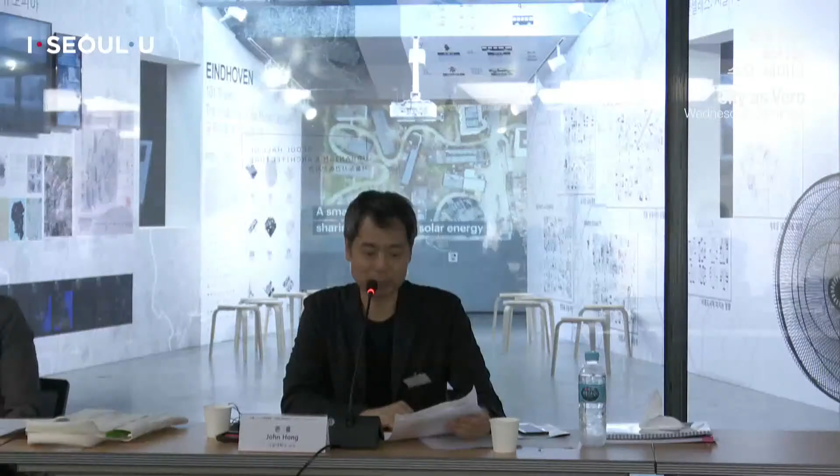Thank you for joining us today. This is the second in a series of Wednesday seminars, and we're very lucky to be partnering with Amsterdam today. Our first speaker is Paco Bunnik. He's the Chief Urban Designer of the Department of Planning and Sustainability. The work of the City of Amsterdam's Department of Planning and Sustainability integrates the higher levels of regional and long-term planning into implementation of urban design and public space design. The department searches for new approaches and stimulates bottom-up, multidisciplinary teamwork that integrates solutions in the fields of urbanization, mobility, and water management. Paco Bunnik is supervisor for the transformation of the Amsterdam Northern IJ waterfront and related projects, and member of the supervisory team of Amsterdam Zuidas Central Business District. Please welcome Paco Bunnik.

Hi. Hi, John. Good morning. Yes, thank you so much for joining. Yeah, great to be here. Although virtual, it's very nice to be back in Seoul. Well, if it's any consolation, it feels like you're in the room right now. You're live. All right. Hey, what's the plan? Shall I start or? Sure, that would be great. Yeah, okay, I'll share my screen. Is this clear? It's perfect, it looks very clear.

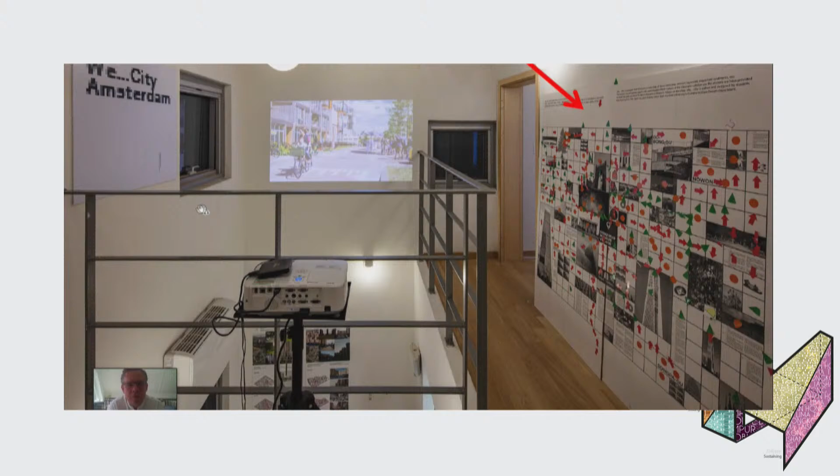So it's very interesting, I think. I would like to come back and talk to the students and maybe make these kinds of itineraries, and by walking, discuss how the city is evolving. So we also gave them a wall in our exhibition, so that they're really incorporated into our exhibition.

I'll tell something about Amsterdam right now—what we're doing, how we're planning, where we come from, where we're going. And also reflecting on the Building the Resilient City theme, which is the 2021 theme for the Seoul Biennale of Architecture and Urbanism.

Amsterdam—this is a nice series of maps which shows the development of the city of Amsterdam, from the 1250s to right now. You see it started as a fisherman's village right on the open waterfront, directly connected to the sea. And later, when the Dutch traveled abroad with the VOC, the East Indian companies, we got richer, and we founded this famous canal district city, which is right here.

What you see happening is that because the city is growing, blue becomes green. So water is—we call it inpolderen—turned into polders, gained from the sea, made for agricultural purposes to feed the citizens of the growing city.

Then in the industrial age, train lines were made, and more blue becomes green, and the city is still growing. Then in the 60s, you could call it the age of the car—new car roads were planned, new land was made. Also the surrounding cities were growing, as you see. But this is really car planning modernism in a way.

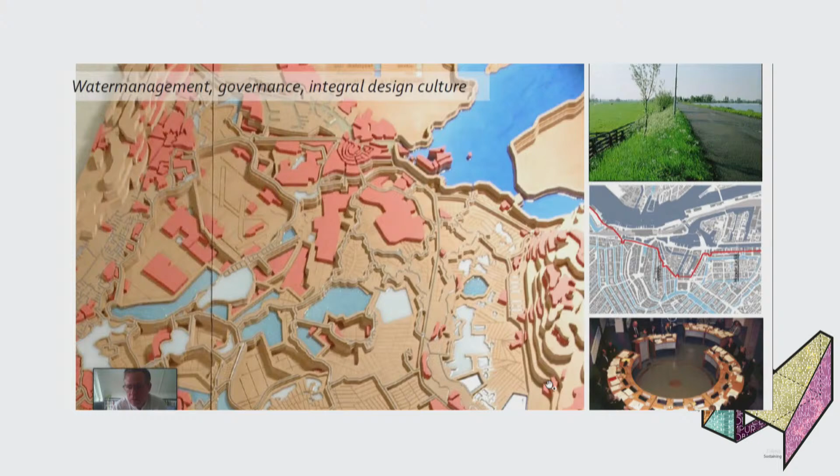That means that's also part of the way we think and design on multiple scale levels—it's in governance, within the city limits, but also in the landscape. So it's all done in one system.

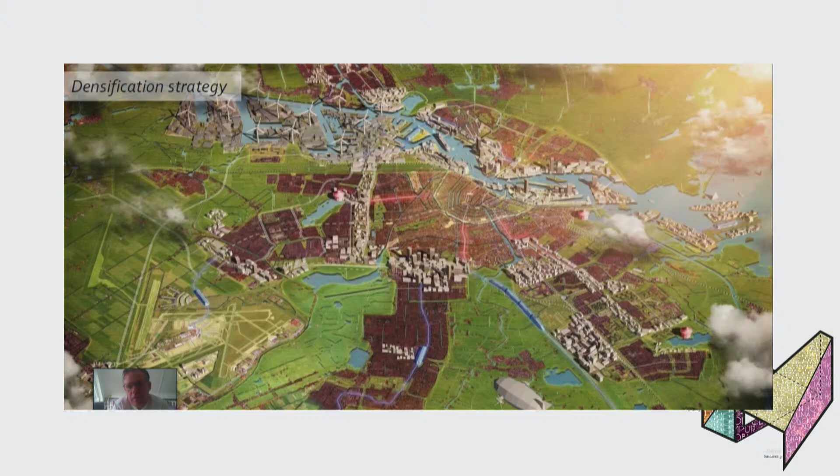When you look at the city itself, this is a map we made in 2011. It's a bit old but still quite active and right. I think the densification strategy—because we're growing, the city itself is about 880,000 people, and the region is about 2.4 million. In the city itself, this is an extension plan made in 1934. There was first this circle, and then these fingers came out in the extension plan of '34.

What we do now is densify within the existing perimeter of the city. The city looks more or less like a hand - these are the fingers, and this is the landscape interweaving with the fingers and penetrating towards the center. We really like this scheme because you're always within a 15-minute bicycle ride of a beautiful landscape, so the relation between city, landscape and water is always eminent in Amsterdam.

But because we're growing, we have to densify within this perimeter of the city. We do it in two ways: on the waterfront, or on pre-industrial zonings or the car road around here. So we try to make smart use of the space.

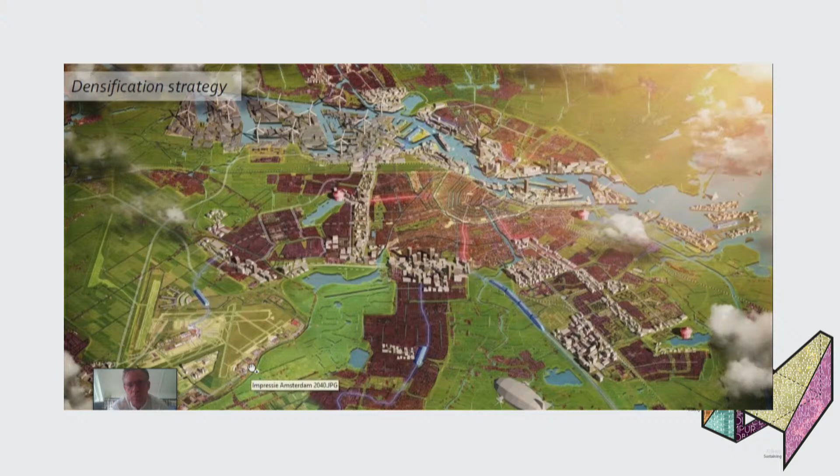Here in the picture, we make new land, new islands on the waterfront where we build new cityscapes. But I think this is only about 10% of the renewal. I think 90%, by far the biggest, are in these transformation sites - old industrial sites, non-used spaces. This is the biggest task we're having right now.

Amsterdam has a DNA, I think, with a local connection - it's founded on the water. It has a relation with water, in engineering, but also in beauty and in culture. It was founded on the river Amstel, where a dam was built - that's why the name Amsterdam comes from. And that's where the old city was built around.

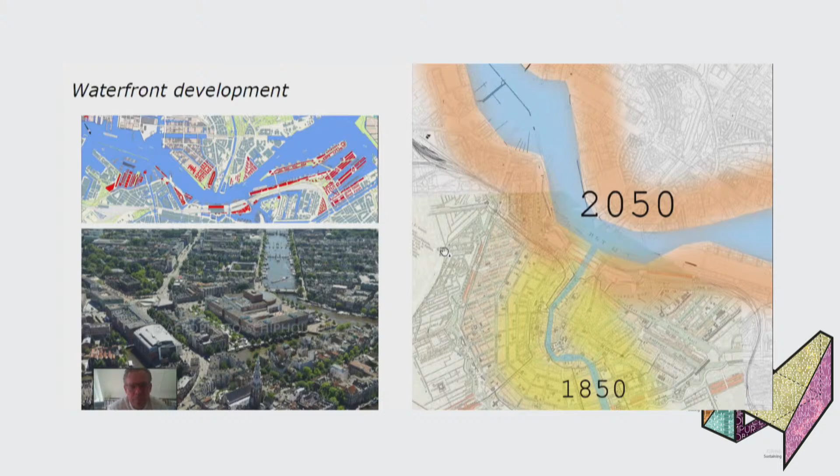But the new city we're building right now is more or less built around these longer waterfront developments. This shifts the center of the city more towards the bigger water, which is really interesting, because in the mental perception of the Amsterdammer, the center is the center of the city. But because we're growing more pluriformly around the center and along this waterfront, the whole mental aspect of what is the center - which maybe for Seoul is already totally clear - is not yet clear for Amsterdam. So we're developing into a more broader system of urbanity, which I think is very interesting and very healthy for a city like Amsterdam.

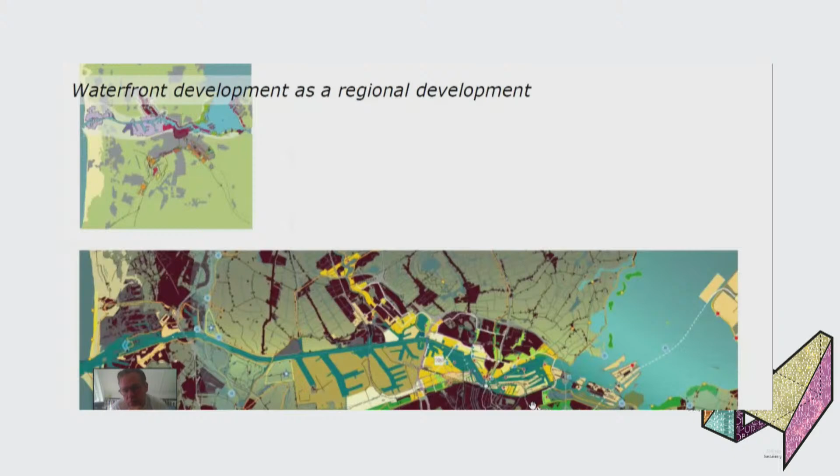It's not only the city, it's also regional. The whole waterfront is about 60 or 70 kilometers of re-engineering, let's say. The harbor is moving towards the sea, westwards, and the city is growing that way, but also eastwards. We have Almere, another city, building new islands like IJburg, and maybe making new infrastructure connections. So in the future you'll be maybe 10 minutes from another city where you now travel for a longer period. Reusing the waterfront and densifying more is a very interesting way of urban design.

Here's a picture of the metropolitan region level of Amsterdam, with bigger numbers, still growing in economy and jobs, also having to deal with climate change, and energy production and consumption changing fast. So how to deal in a bigger scope with these themes.

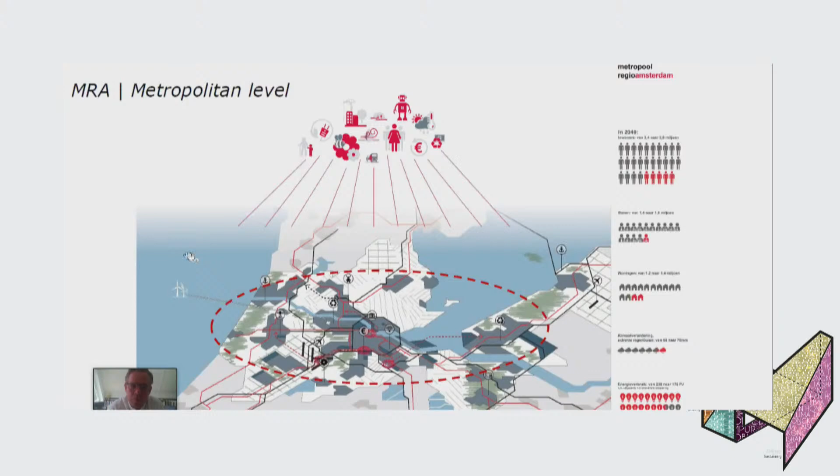When we zoom back into Amsterdam, within the city limits, right now I'm supervising the northern parts of the waterfront, because the southern parts are more or less finished. Here's a project going on, and here's a really big one - Havenstad, which is about 50 to 70,000 new housing units.

On the whole, you see that within a not really big area, we're planning more or less more than 120,000 housing units, which is enormous - you could say it is a city within a city. And it's not only houses, you need public space, hospitals, new schools. So it's all part of what we're planning right now in Amsterdam. Within the existing city limits, we're densifying enormously.

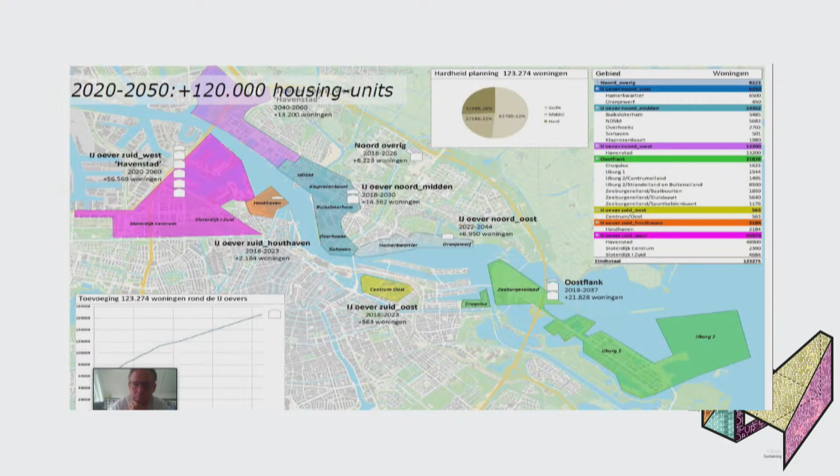Now we're currently designing a new plan on Zeeburg Island, where we also experiment with new typology. Amsterdam is not really known for high-rise, more low-rise, mid-rise, with some high-rise elements. This is the first urban plan where we really experiment with high-rise, also because it has a position in the middle of long views, so it can be interesting to test high-rise here at different scales.

But we also make other, more suburban typologies a bit further out of the center, which have a more natural or beach-like character. So it's a very sort of catalog of urban design on many levels, you could say.

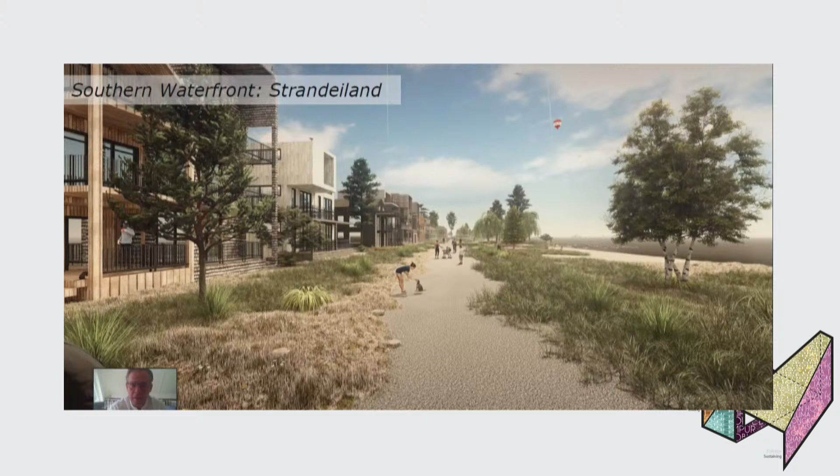Very important in this whole waterfront strategy is investment in public domain, not only in public space, but also in landmarking and programmed landmarking of culture, which is super important. On strategic locations on the waterfront, we planned nice, beautiful, big buildings with, for example, a film museum, theater, courthouse, musea, etc. So they have a fixed place on this waterfront, so you can travel by boat or experience the waterfront from the point of culture. This means an enormous revenue for the city.

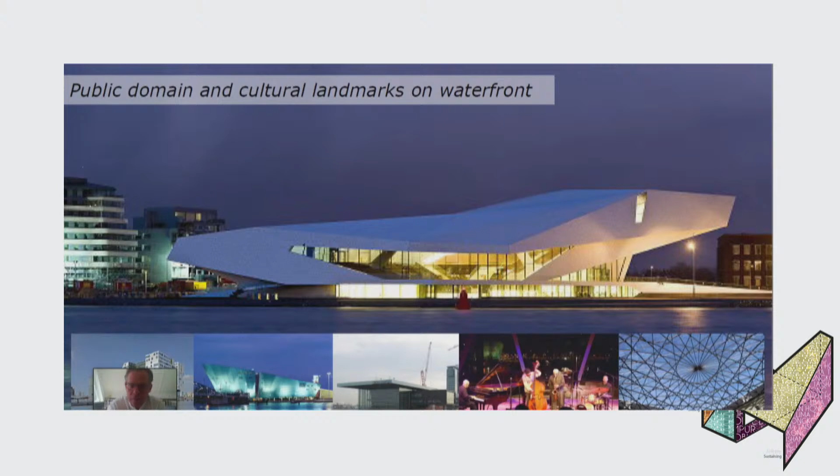It's always multi-dimensional. Originally, the city itself planned to have a sort of urban business district on the waterfront. But then the first bank, the client ABN AMRO, decided to go more near the airport, and out of that plan, the central business district was founded. So the whole waterfront is more or less without big business. It's more culture, housing, and public space, which really defines the character of that waterfront.

I told you also that public space is very important. So how do you invest in it, so that it can be adaptive to climate, but also to different kinds of uses. I think in any waterfront project, the huge investments will be in public space.

When we go to the northern waterfront, this is also the thing we exhibited in Seoul. We look at a totally different kind of character of a cityscape. On the southern part were harbors, so not really polluted, but just all the remnants of harbors, which were empty, redone into new city. But on the northern waterfront, there were really large industrial sites, very polluted areas, very hard to make new city schemes here. But anyway, we're working on it, and we're doing it quite successfully, I think.

Here you see some projects. This is the NDSM, a former shipyard. It used to be a secluded island, with the water going around it. These are remnants of the old shipyard, where really big ships were built. Then when it was empty for a few years, it was squatted, and then the city made new plans to build a sort of new urban area in the whole area.

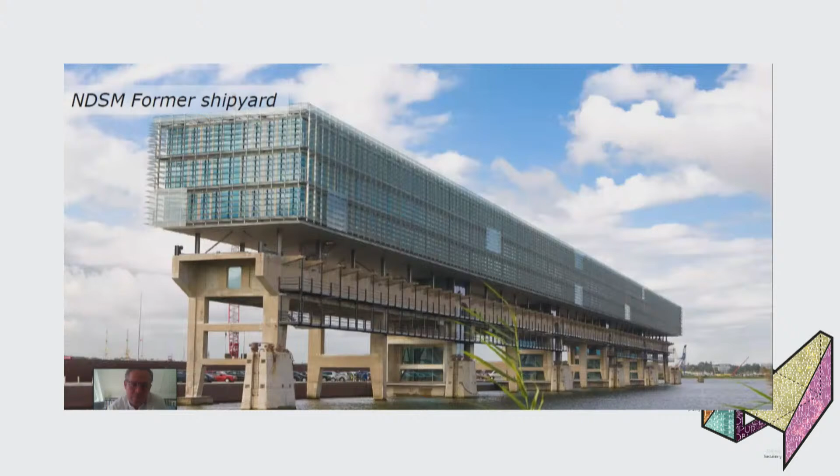You see an example of an old crane dock, where by a local initiative of Trude, an architect in Amsterdam, she said, 'You can't demolish it,' because the city plan was to demolish this whole structure. She made a plan to save it and to build an office building on top of it. Now you see that this kind of initiative is embraced also by the city, and it means that you add value and plan more towards your history, not only the future.

Here you see another example of how to reuse this kind of post-industrial site. These were the slopes where the big ships were built and sent into the water. Now we use it for big festivals, etc. Within these huge cascos of the old industrial buildings, we plan a variety of programs - dance festivals, artists' villages within. So the numerous programming within this whole casco city gives a huge liberty for cultural programming for the city itself.

This year we will open up the biggest street art museum in the world, also here, and it started really local and small, but now more famous artists have come in, already visible in the area. This is going to be professionalized, and it's also becoming a really important museum in Amsterdam, and maybe worldwide, celebrating street art.

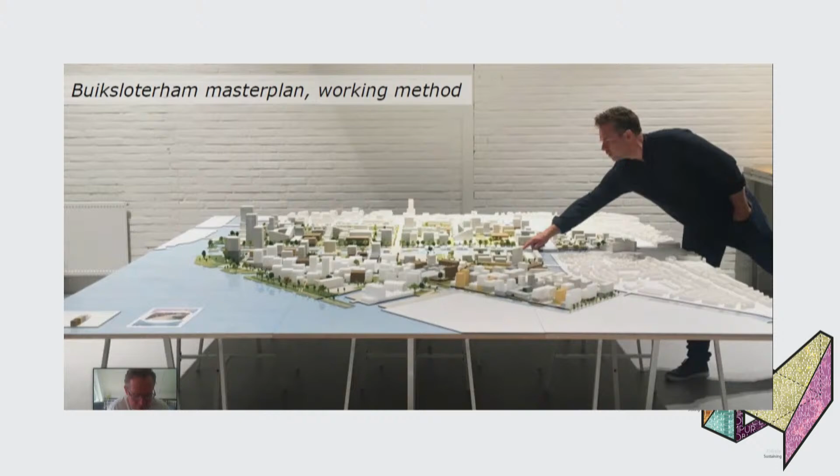I would like to explain the working method, which fits, I think, the Biennale theme and also the way we could work more inclusively in urban planning. The Amsterdam urban planning system was quite top-down for maybe decades, and now we are trying to develop methods where we can include external professionals, young architects, habitants, stakeholders, etc., within the process of planning.

Which is not easy, but you just have to do it and see what comes out. And this project, for me, was the first real test case of how you could do that.

Not only that, we also incorporated participatory input on the green vision, with local residents who were quite sharp, because they knew their surroundings would be intensified. There were about 1,000 houses, and when the plan is finished, there will be 8,000 houses. So their whole surrounding is changing, and they really wanted to be sure we incorporate enough green and quality in the urban plan. So we invited them to show what we're doing.

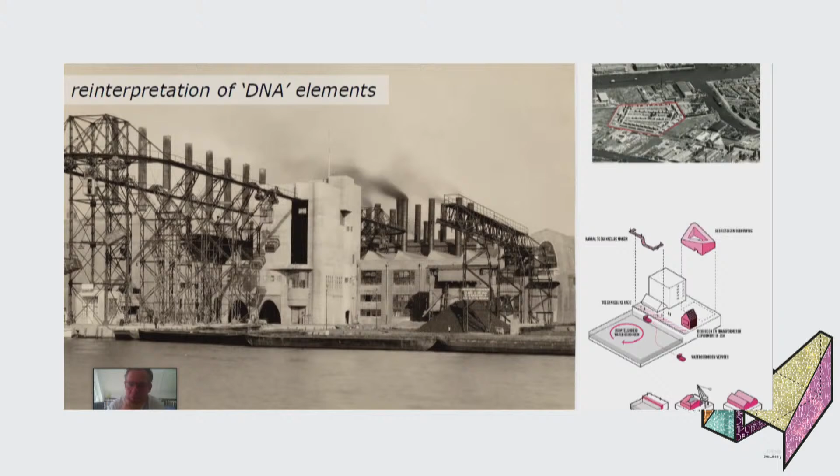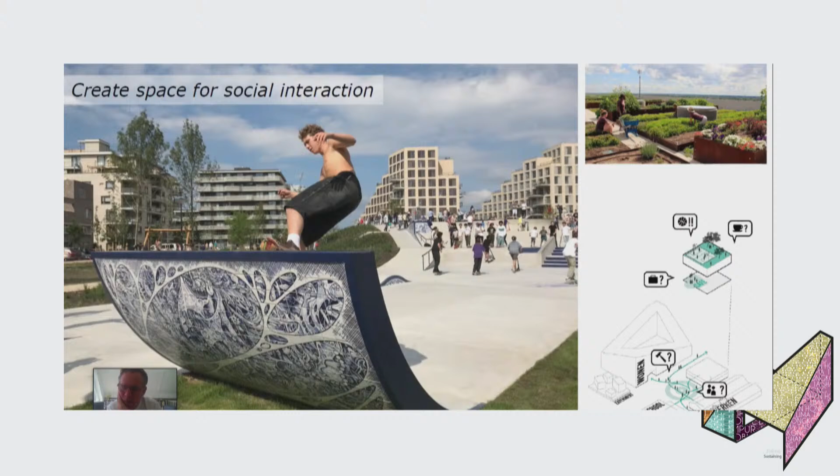We also say that urban planning right now is not only building programming, but maybe the most important program is public space itself—creating places where people can interact, do sports, etc. So thinking about the in-between, what it means and how people can meet, is super important for me.

When we reflect on the theme for the next Biennale, building the resilient city, I was thinking about what we are doing right now in Amsterdam and how we could contribute next year and have a discussion afterwards here. So I'll show you some themes.

Amsterdam has a very strong bike culture, and what's interesting is that it's growing quite fast. In 2014 it was at a modal split of 32%; it's now already at 40%. So the bicycle and the pedestrian are used most.

But what you see in reality is a kind of unfair system of using space. The bike is used mostly by our inhabitants, but the use of space is totally different. Car parking space takes up a lot of room, and 97% of the time those cars don't move at all—yet you use about half the space for the car park. So we can plan much smarter in public space to give more meaning to this interaction and to mobility systems. I think we are in that period of transitioning there.

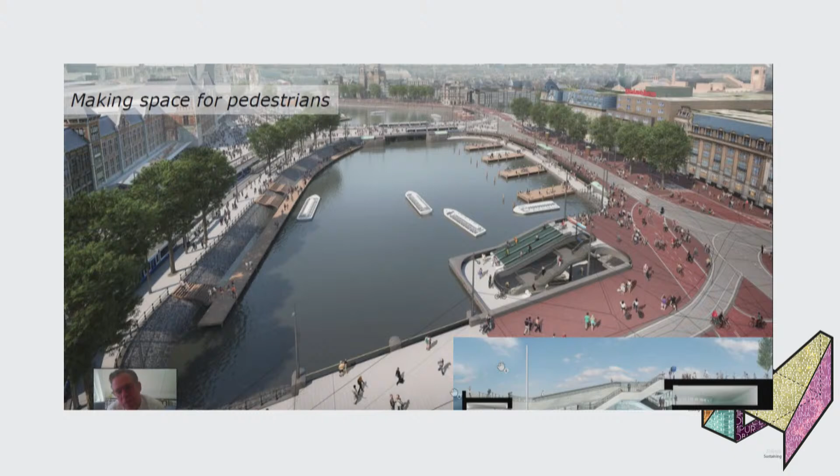So when we redesign this square, we get rid of car infrastructure, open up for water, and underneath the water we build parking spaces for bicycles, keeping the plateau itself free for pedestrians. These are some renderings showing more space for pedestrians and bicycles on top, less for cars.

And underneath this whole water system are 12,000 bicycle parking places. It's a big urban public investment to work for the city of the future, let's say. This is on the front side of the central station and also on the back side on the waterfront, which is a really beautiful area with big views.

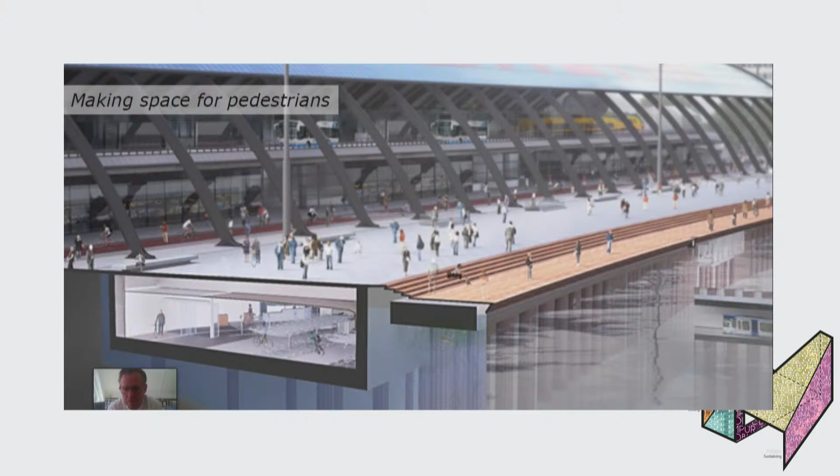We do the same there: we make a new plateau and underneath, bicycle storage. Right now when you go to Amsterdam you see this big bicycle storage on top, blocking the view, but this is under construction right now. In two years' time you'll have an open view on the water.

So the whole quality of public space and spatial quality is, I think, number one for pedestrians. Not only here, we do it in many places, many big squares.

This is Zuidas, a central business district. It was a totally stone square with no trees, nothing. We redesigned it into a more green area with many seating places. It's very important that you give people the opportunity to sit.

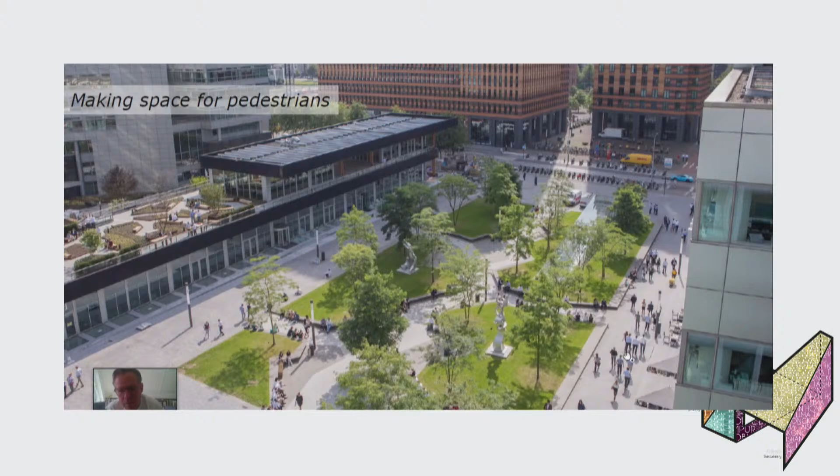But not only that—underneath, also here, underneath the whole square is a bicycle parking, and underneath the bicycle parking is a 1 meter storage tank for water. So in cases of heavy rainfall, this whole system contains the water.

So it's integrated thinking, design thinking, which is social, cultural, biodiverse, but also water management, in one element. That's the way we try to plan our cities.

Colleagues of mine are now working on a quite successful program—a new Amsterdam integral design method. I think it could be interesting to show next year in the Biennale. It's a really refined method of how to deal with public space in this way, doing research on multiple themes: water management, materials, mobility, soil, underground energy, flora, fauna, so nature-inclusive. We find all kinds of ways of possible combinations and measurements in design to incorporate all these elements.

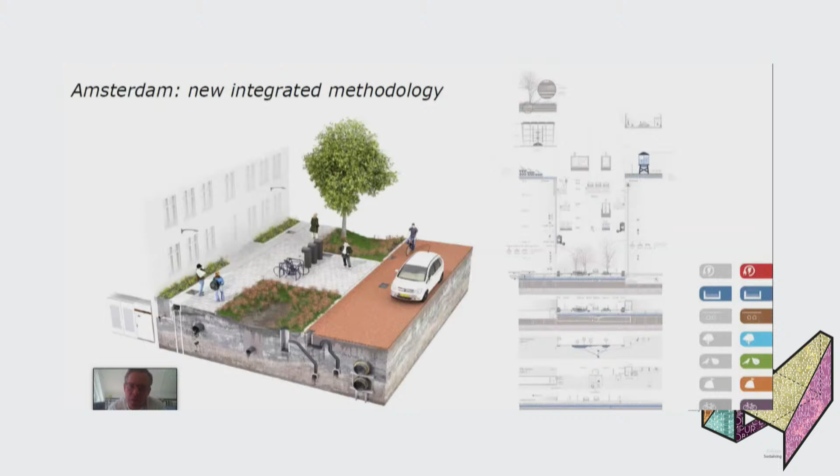I'll just show shortly one of these parts, which is water management. We really study the public space and the buildings together, how they work, how they're measured, how the water is working, and how we integrate them into the new standard way of designing a street network.

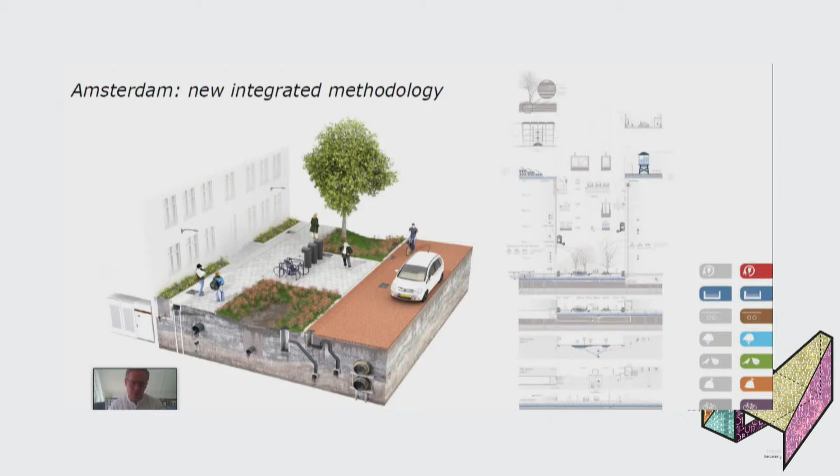So this is just one picture of hundreds, but we're really working on this integrated way of public space design. I think this is my last slide before Tjeerd starts.

When I think of an inclusive city, I think it could be really biodiverse, productive, very important, inviting—which Seoul is, I think, by heart—and adaptive. You should plan in a more adaptive way, and I think not focus on fear and control, but focus on well-being of nature and of people.

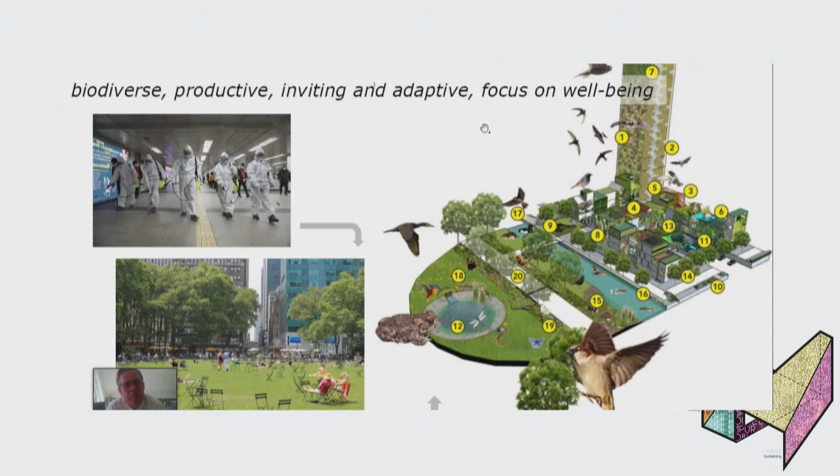I think this is my last slide. This is a picture I found on the internet: the people of Seoul thanked the workers who fight COVID with new technology. I think this is a great picture to end my story. Thank you.

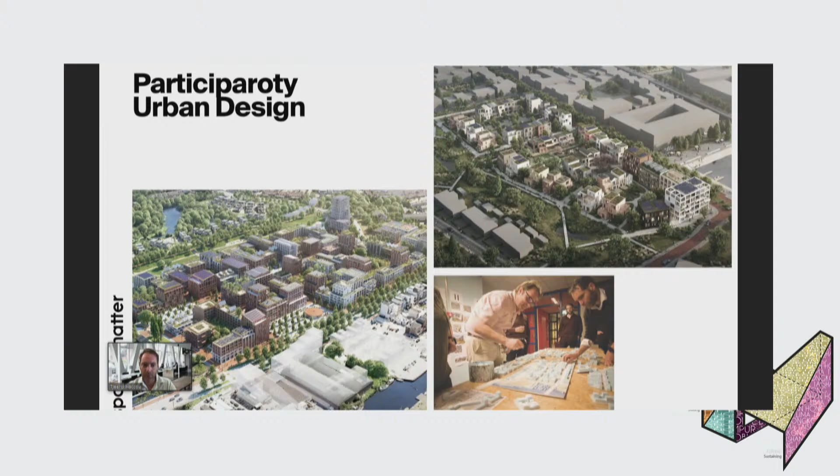We do that on multiple levels. This is the larger level, participatory urban designs, mainly in the Netherlands. We make plans preferably together with residents or people who already live around the areas. In Amsterdam we are working now on three different urban plans, and some others in the south of the Netherlands. But what also characterizes our office is our bottom-up ways of working.

When we started in 2010, there were no commissions because there was a financial crisis going on, and we had to come up with our own ideas and concepts and start building projects out of those. Nobody called us for a commission, and that led to particular projects like the SWEETS hotel that John already introduced, a hotel we made out of 28 bridge houses in Amsterdam that were becoming redundant.

We also initiated a large rooftop urban farm in The Hague—another city—where there's 1,200 square meters of grow beds for crops and 500 square meters of fish beds below them. The dirty water of the fish is pumped towards the green beds to feed the plants, so it's kind of a circular loop there.

Another thing we do frequently is help bottom-up building groups realize collective residential buildings. We've done around six of those. We really promote this way where people themselves come up with ideas and create their dreams, instead of having a commercial developer just build something that fits everyone, which results in boring buildings.

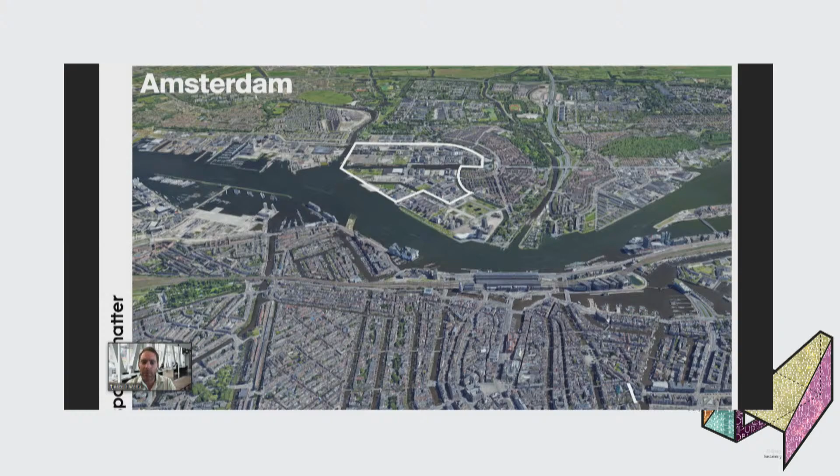Today I will talk a little bit about the Buiksloterham area that Paco already introduced quite a bit. It's in the north of Amsterdam, and our office is actually right in the middle. This is also the place where our first projects really started, and two of those I'd like to tell a bit about: the Ceuvel, and Schoonschip.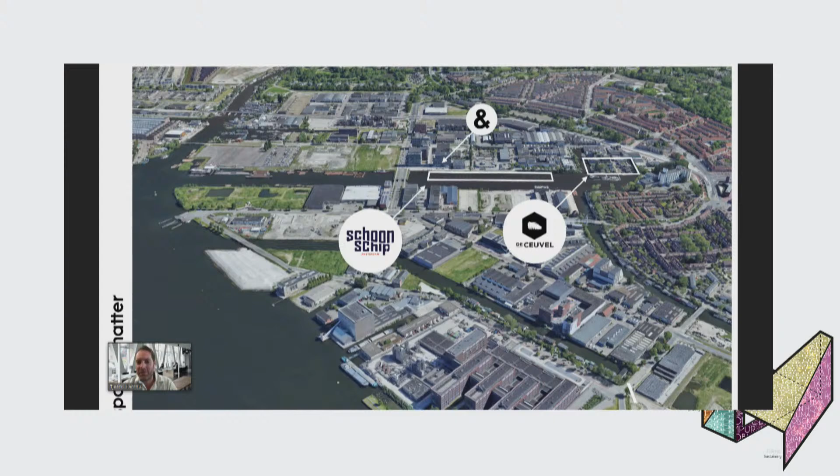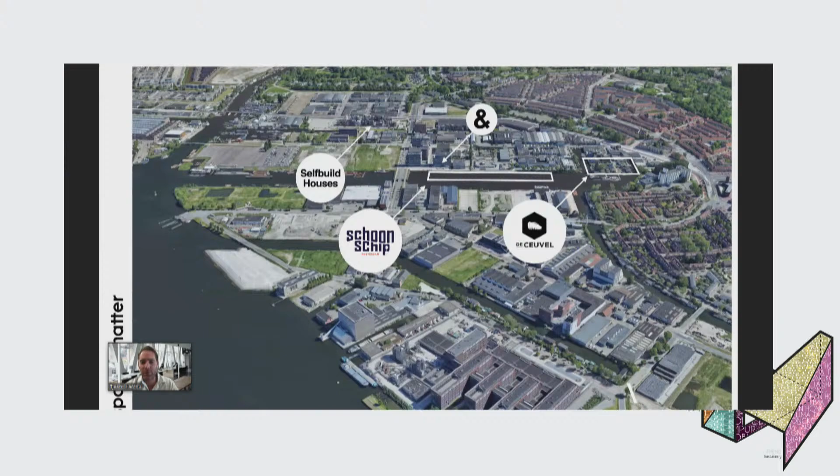It's real Dutch, but Schoonschip means 'clean ship.' Another thing relevant for this presentation is the self-built houses—the arrow shows where my own house is. So I both live and work in the area where I also have the most relevant projects that we do. I made a 5-minute city for myself.

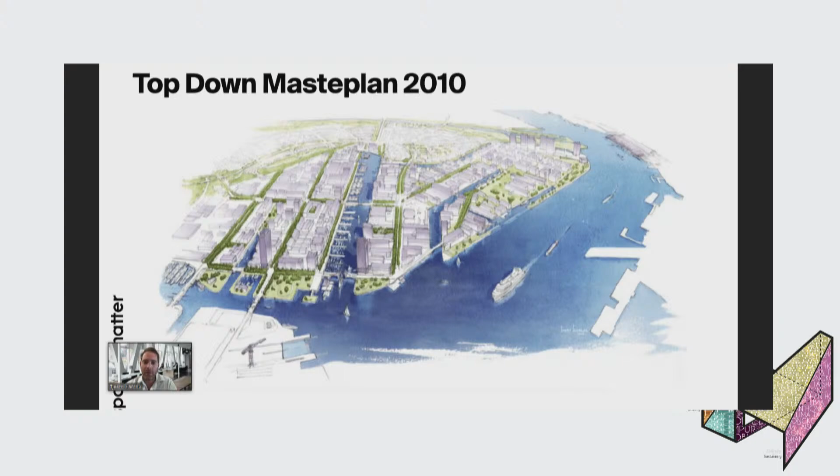The municipality had big plans for this zone, already before the financial crisis. They made a huge master plan for about 8,000 houses, and were speeding up leading into 2010 to implement this master plan. But then the financial crisis hit, and all developments in Amsterdam came to a stop because commercial parties did not want to invest anymore. Plus the municipality also had to pay a lot of money to get things going, which was not possible at the time. So Amsterdam came up with the idea: what if we let our citizens come up with plans?

Then Buiksloterham became a test area for self-built housing, both on a very small scale—individual housing—and as collective buildings.

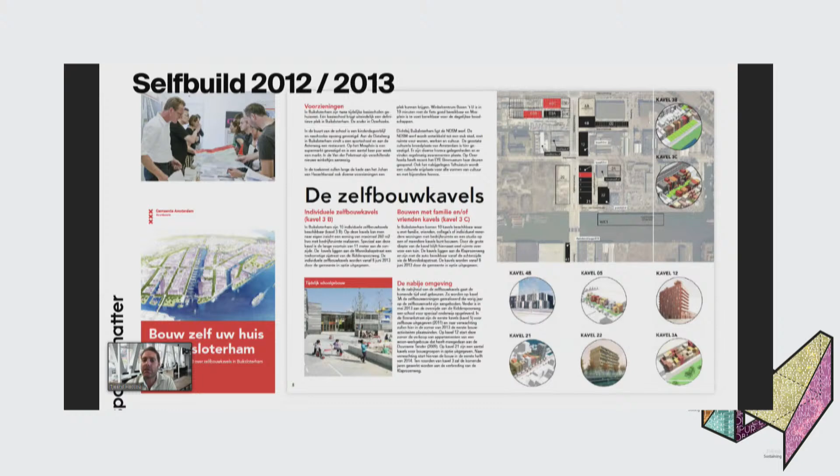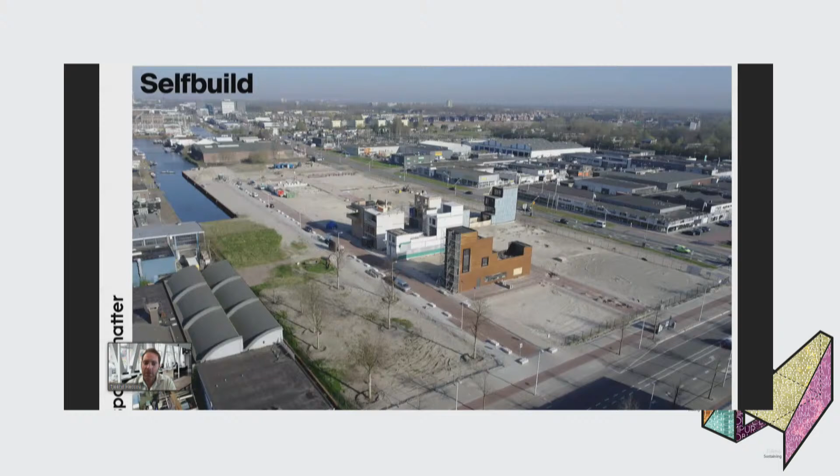The start of this was very slow. Personally, I also managed to buy one of those plots, but no one else wanted it. This was, I think, 2013, when it was kind of an unpopular way of building your house and of living. But then when it started and people saw the potential, it became quite a popular thing in the years after that.

Until it climaxed in, I think, 2015, when people were camping out to wait in line for six weeks. This self-built camping site became news in itself, because it's a kind of micro society that invents its own rules of how people should behave in standing in line for their plot. It was an interesting process.

We had these self-built, small-scale initiatives, but also more collective buildings. This is, I think, seven different buildings, also shown in the movie playing behind you, that were initiated by building collectives. This is actually how large parts of the Buiksloterham are now developed. It's bottom up: people form a community, have their own idea about housing, and build with an architect the house that they want, without a commercial developer guiding them.

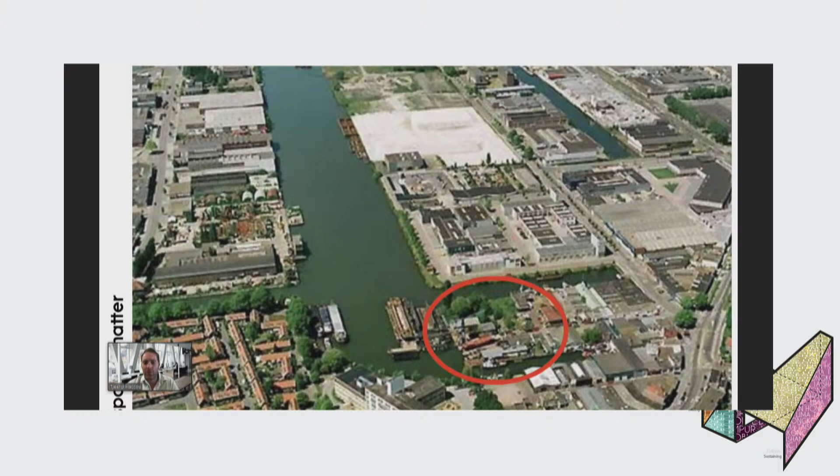Sorry for the bad quality of this image. This is a picture of the Ceuvel in its state before 2000. This is the project I would like to share with you. This is an old shipyard. Here you still see it in practice as a shipyard. But when we found this area in 2012, it was not a shipyard anymore.

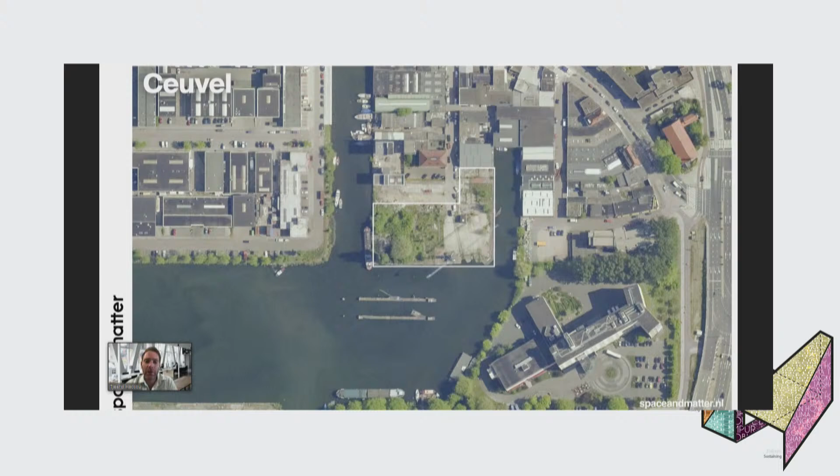It was actually the municipality that had this land, and they thought, well, we need to do something with this. This whole Buiksloterham area back then was a very kind of no-go area. It had all kinds of small industrial companies working there, and as a citizen of Amsterdam, you wouldn't want to go to the Buiksloterham. Then the municipality said, let's launch a tender for this empty vacant space, and ask commercial or market parties if they would like to build a creative incubator on top of this land.

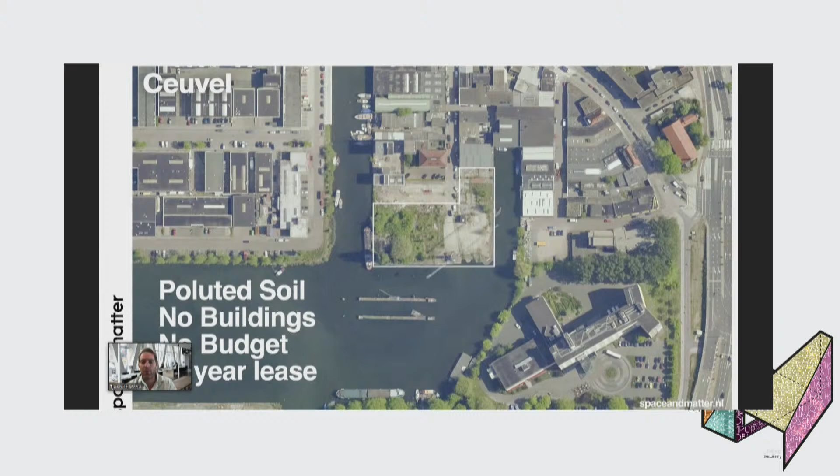But there were a couple of issues. As in the whole Buiksloterham, the land here on the Ceuvel side was very polluted, with a lot of contaminated soil. Another issue was there were no buildings, so making an incubator space for people to work - where are you going to position them? An incubator space is meant for people in the creative industry to find very affordable office space, so there is very little budget. But if you came up with a realistic and manageable plan, you would earn a 10-year lease from the municipality of Amsterdam. So: no money, but soil.

Then we started to think, how can we deal with these issues? We formed a group of, I think, a couple of architecture offices and a landscaper. The landscape architect came up with the idea to use phytoremediation to clean the soil. That means you plant plants, and the plants suck up the contaminants and use them to grow. If we make the whole area a kind of green garden that cleans the ground, we could leave it in a better state when we leave after 10 years.

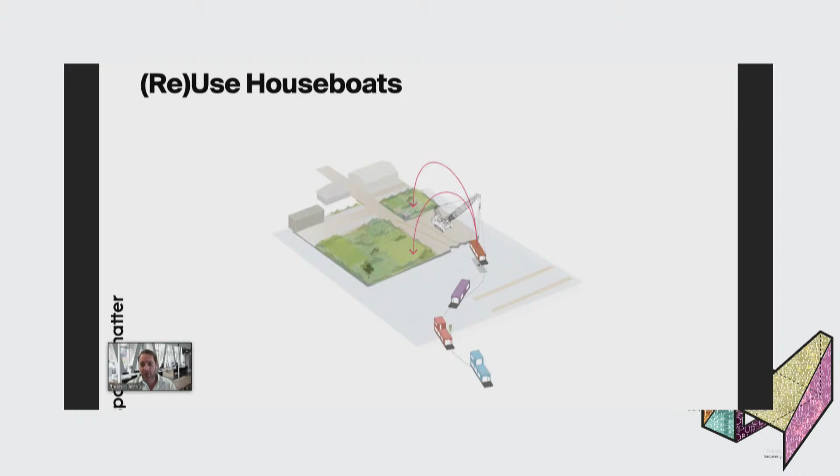So then another idea we had is, why not put old houseboats from Amsterdam on this found garden? Because houseboats in Amsterdam have a negative value when people want to renew them. People in Amsterdam have a position for their boat, and when they want a new one, they have to get rid of the old one and have it demolished. We thought, well, if they don't want to demolish it because they'd have to pay like 10,000 euros, then we take the boat for free maybe, and put them on land. So then we have free space.

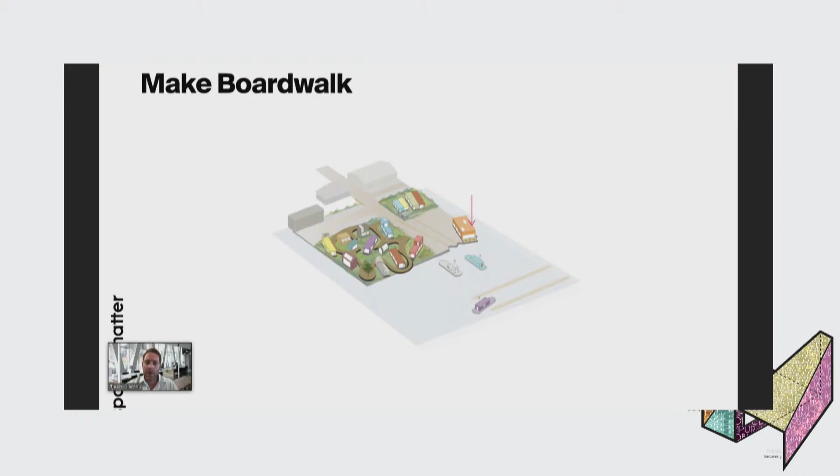Then when we position all the houseboats on the land, we make a boardwalk to connect them and to keep people off the contaminated soil, and we just use the land as a creative incubator. After 10 years, when we need to leave - which will be in about 5 years from now - we just put the boats back in the water and sail to another location, leaving the Ceuvel as a greener and cleaner place than we found it.

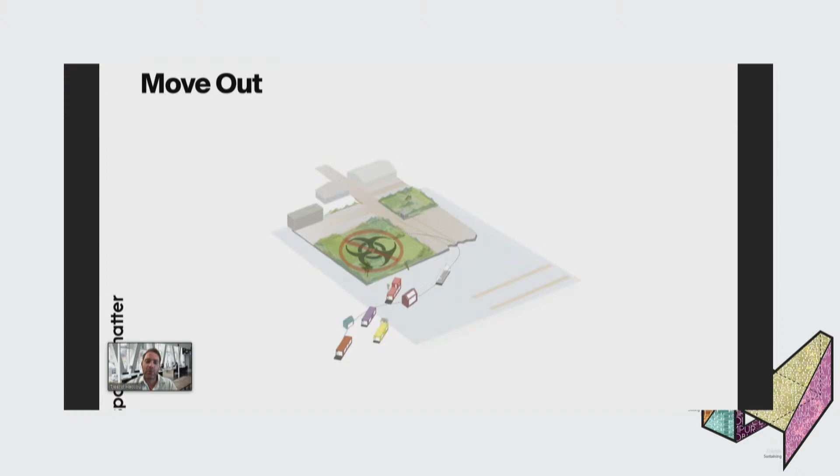So that was our plan, and we made a visualization with that. Then in 2012, we heard that we actually won the competition. We were very happy, and we did not do it alone with designers, but also with a lot of entrepreneurs who already came up with an idea how they would like to work on this land and what they wanted to do with their houseboat.

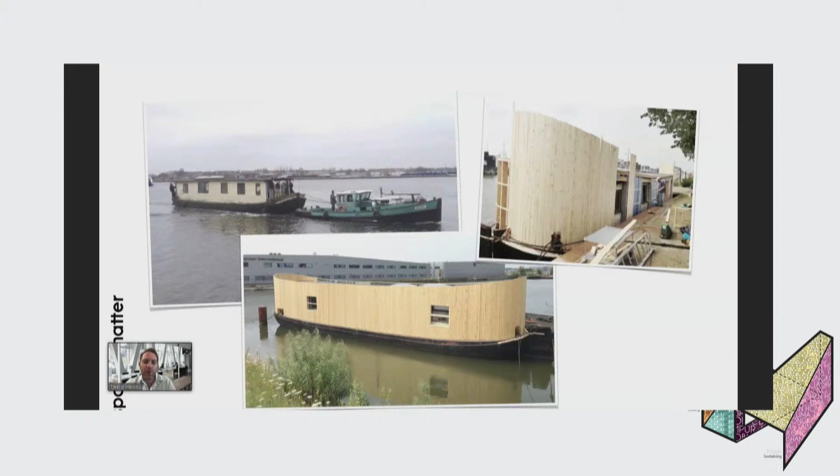So this was the first boat that we got. We paid €1 for it. It was in terrible state, but with a lot of help from the people who eventually rented this boat, we could manage to revamp it, make a new facade around it, also make it way more sustainable and insulate it in a proper way.

And then in November 2013, we collected all the 16 boats that we managed to buy, and we put them on the land with a huge crane. We got a lot of kind of weird objects, well, I think the average price here was really €1 per boat.

The ambitions of the Ceuvel, especially the sustainability ambitions, were really, really high, but there was very little money. So our partner office, Metabolic, who is a kind of sustainability advisory office, they organized workshops for all the future tenants to make, in a very low-tech way, sustainability systems.

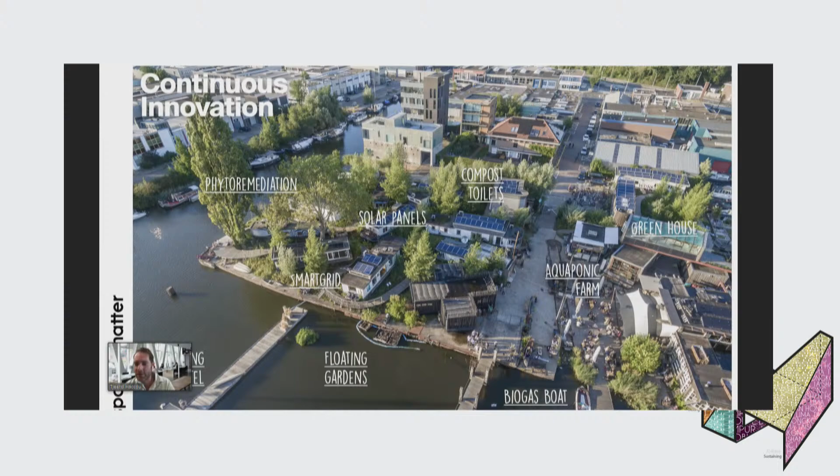So there's solar panels on all the roofs of the boats. There is an aquaponic farm with fish and a greenhouse on top, and it has the same circular system as the greenhouse that we made. There's floating gardens, and there is a boat that produces biogas from the waste of the houseboats, on which you can then eventually cook pizzas in the restaurant.

But one of the main innovations is the smart grid. So all the boats are connected together with a blockchain-based smart grid. The restaurant that you see on the left top, it needs a lot of power, and all the houseboats on the right side have the solar panels.

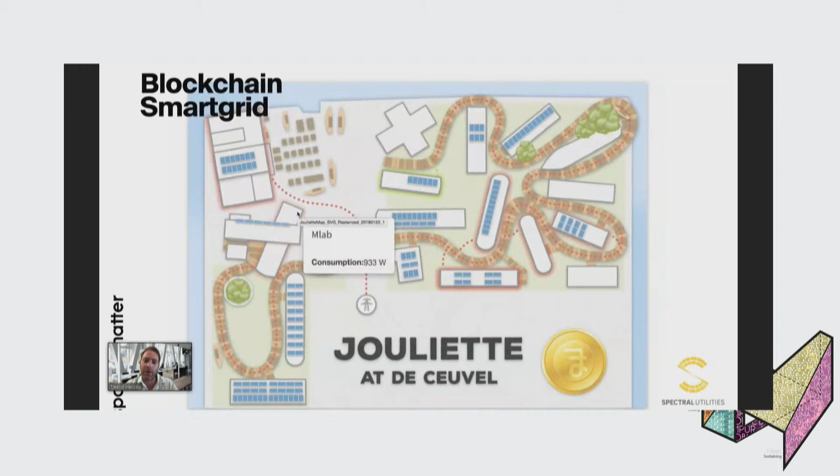So the houseboats can sell their photovoltaic power to the restaurant, and in exchange they get Jouliettes, which is a kind of cryptocurrency. And with that cryptocurrency, they then can go to the restaurant and just buy food or beer. So it is a very concrete way of how a system like this could work.

Because of all these clean tech innovations, there was a real community around these ideas that came to the Ceuvel, both to work but also to enjoy themselves. So it is a very strong creative clean tech community that was built by building the Ceuvel.

So also the routing on the boardwalk, there's all these signs on how we treat the different topics. So it is really a kind of educational routing through this site.

Well, the Ceuvel got a lot of attention in the media globally. We were published, also in Korea, in Japan, in China, in the US, all over the world, which was really nice, because then also stories land at other sides of the world.

But also for the local context, it did a lot, because Amsterdam then saw this happening, and we call it the circular economy that we try to push at the Ceuvel. Then all the developing parties, the builders, and all the groups and the municipality that were developing in the Buiksloterham area signed a manifesto that all the developments in this area would have this circular ambition, so that we would take care about reusing waste, being very smart with energy.

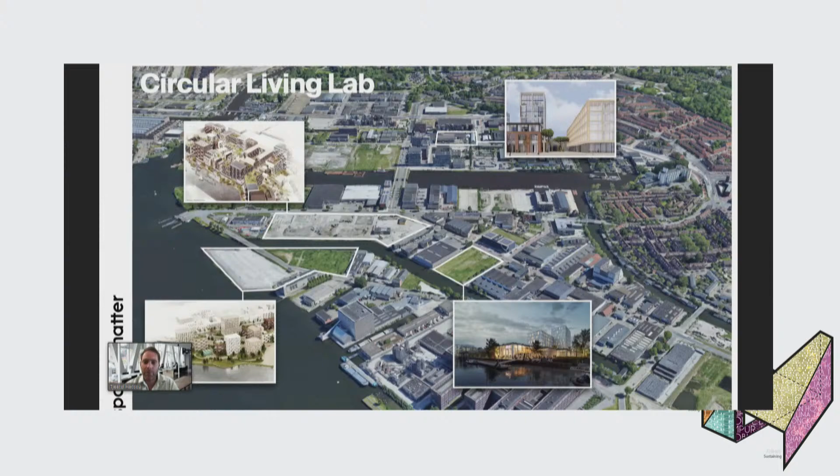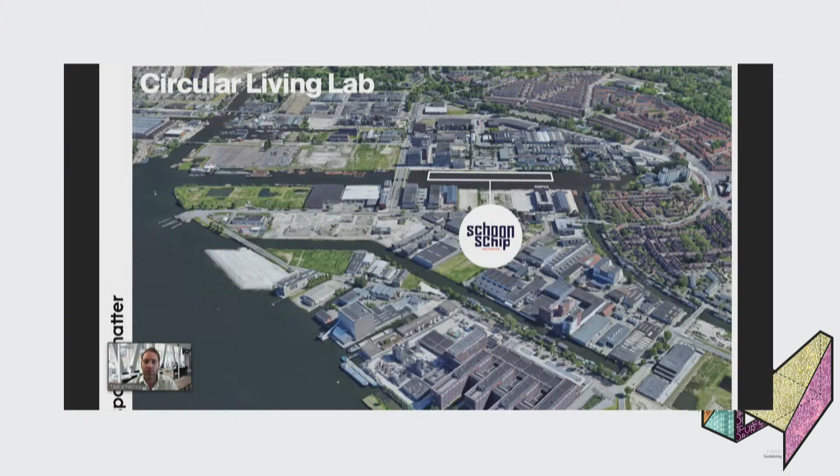This whole Buiksloterham will then become a kind of ecosystem network. One of the most advanced projects in this area is Schoonschip, Cleanship, in which we already made a lot of the ideas developed at the Ceuvel, scaled them up, and put them into practice for a residential project. Schoonschip was also a real bottom-up development.

It started with the lady on the left, Marjan, who we met around 10 years ago. She had this dream that she wanted to live with her friends in a very sustainable and floating way. When we met, we said we would love to help you with realizing your dream. We had some workshops with the group, translating their idea into a plan.

So we made a booklet, nice visualizations, and a nice model, and then we went to the municipality of Amsterdam and asked, can we have a place for this? We just need a plot of water. And we managed to get one in the Buiksloterham area, as you can understand now.

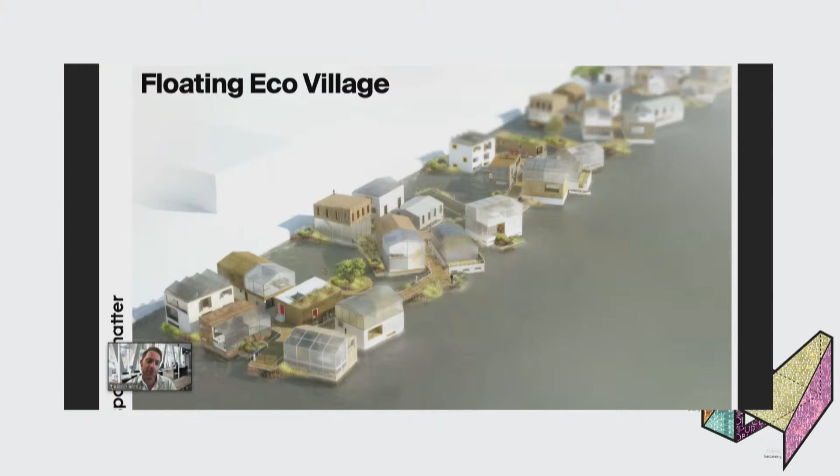We had this idea to make it a very floating eco village. There are currently 46 households living here on 30 floating villas almost. So we helped the group create an urban plan for them. What they thought was very important was that they could all have their individual house. So we made a plan for different building envelopes that they could then fill in with their own architects.

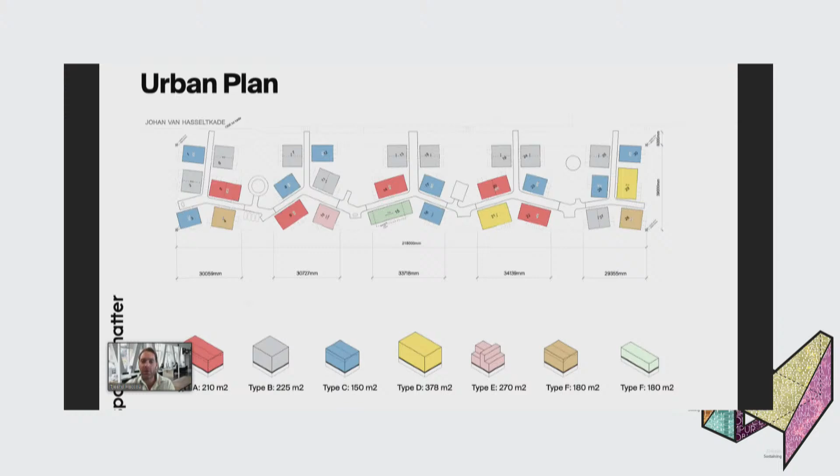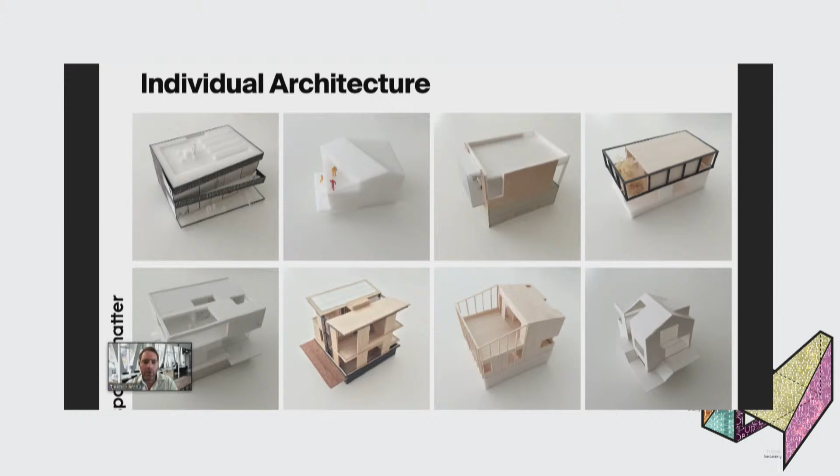This plan was also optimized using some AI to get the best views for everyone and the best production of solar power. So everyone could pick their own architect, and with the building envelope we gave them, made their own housing design. The nice thing of building in water is that you can just do it elsewhere. So all the building sites were not actually in Amsterdam, but a bit outside. Some were also just built on land.

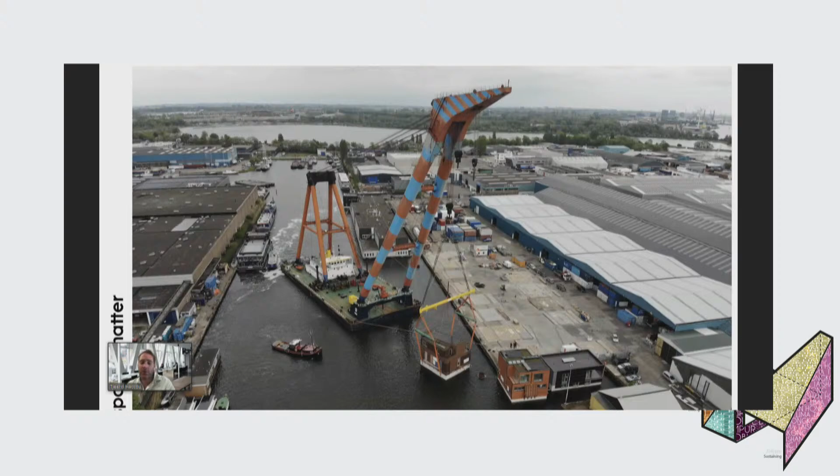Here you see 7 of those boats, and then they had to be put into the water. For that, we needed a huge crane. One of these boats weighs around 200 tons, so they're very heavy. This is the largest floating crane in Europe, which we needed to rent for a lot of money to put all the boats into the water.

I think it was beginning of 2019, the boats came floating in. Here you see the potential of building on water, that you don't really have a local building site, but the building sites can be elsewhere. Then you can just, by floating them in, build a neighborhood overnight.

Schoonschip has a lot of collective features, sustainability features. They share 500 solar panels. Each boat has a battery pack. They have heat pumps that use the water they float in to balance the heat in the house. They have vacuum toilets, a smart grid, a lot of these things. All these individual boats are then connected to the smart jetty, as we call it, and in this jetty there's all the infrastructure to make this neighborhood a smart neighborhood.

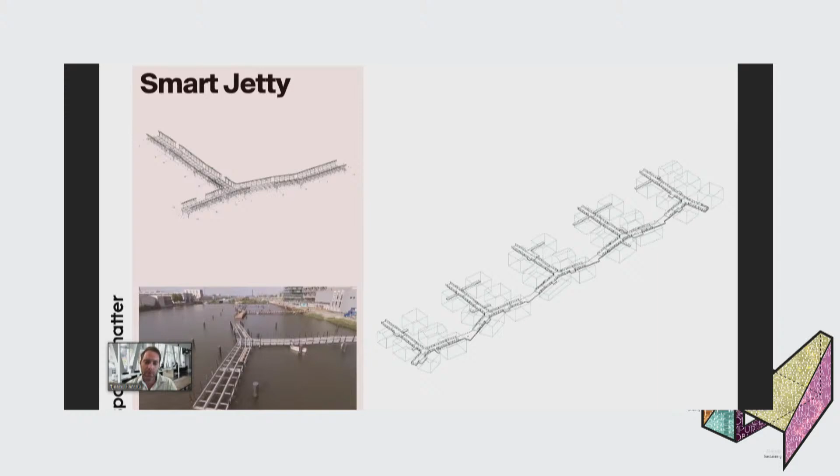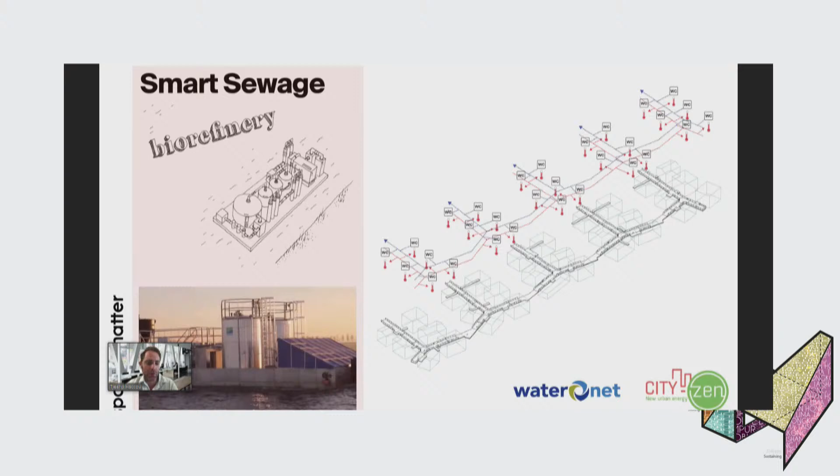This is one of the coolest things in the area, and that's the sewage system. Everyone has a vacuum toilet connected to a grid, a local grid, and the grid goes to this biorefinery that you see floating in on the left side. This biorefinery exchanges the toilet waste into energy, biogas, and fertilizer. The fertilizer is then sold to farmers in the area, and the biogas is used to heat up the boats again. So that is a circular way - you don't have waste, you just profit from everything.

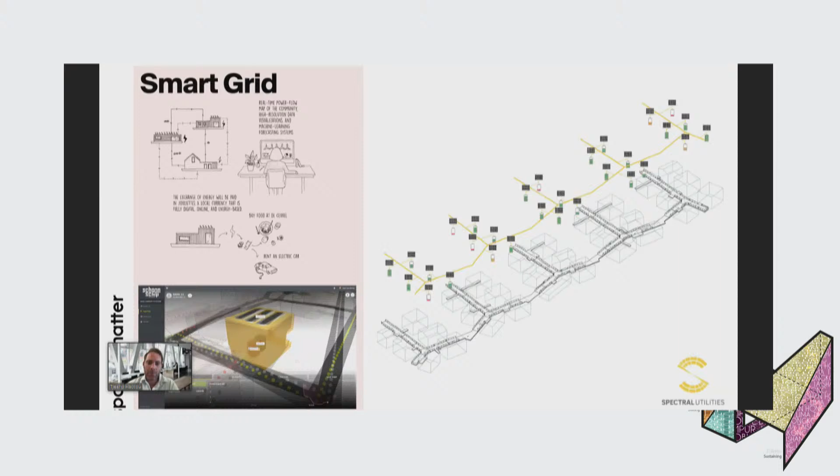Then there's the smart grid, a bit of an upgrade from the smart grid used at the Ceuvel. People also have a dashboard at their house, so they can see how much power they produce and how much they consume from their neighbor. So they can really trade energy with their neighbors.

In the house itself, there's also a lot of smart technology, also for instance with water. Being smart with water, they have a recirculation shower that filters the shower water and circulates it on your head. So you only need 3 liters of water, and you can take a shower for 20 minutes without feeling sorry about it.

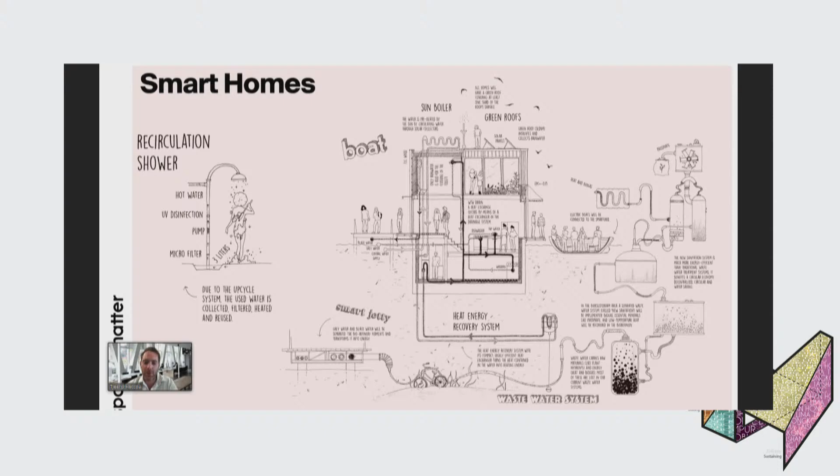The Schoonschip community also shares mobility, so they don't have their own cars, but they share a fleet of 12 electric vehicles, and also electrical bikes and electrical cargo bikes. This is the first mobility hub in the Buiksloterham area.

So that's how we see a smart floating community. And last time I presented this, the question was, how can you scale this up? It's a very good question, but now I found some pretty relevant projects that are actually already thinking about scaling up these kind of principles.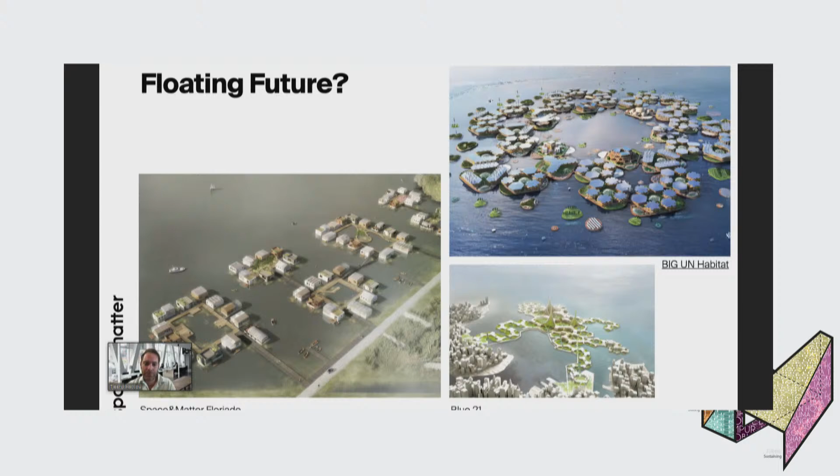The United Nations has sponsored a project by BIG to really think about how floating cities could be a solution for climate change. There are a lot of projects dealing with this matter. We think it's a great way to think by making these bottom-up developments possible, and how you can make autonomous living possible in the future. That is what our concern is.

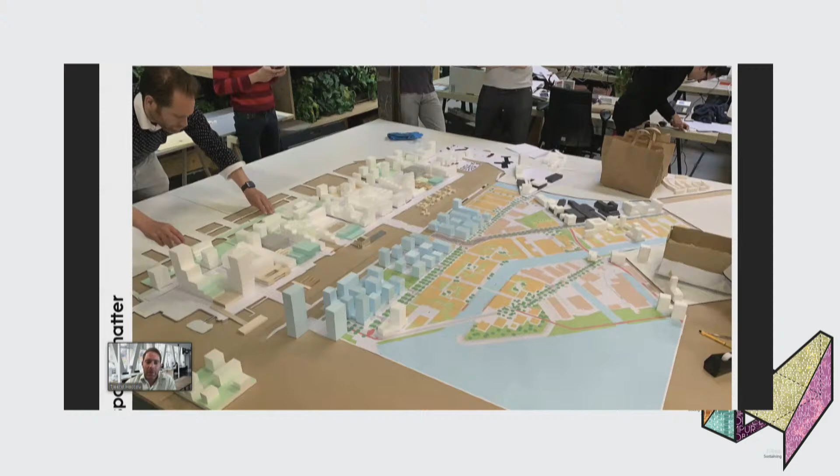Now I've shown you 2 of these bottom-up initiatives, and then I go back to the master plan that we made together with Paco and some other architectural offices, because there was a lot of new development starting in the Buiksloterham, and the master plan wasn't there anymore. So we needed to change this, and that's when Paco invited us as one of 4 offices to think with him and the municipality about how we could make this new master plan. But not just us, also neighbors that already lived in the area had a say in this.

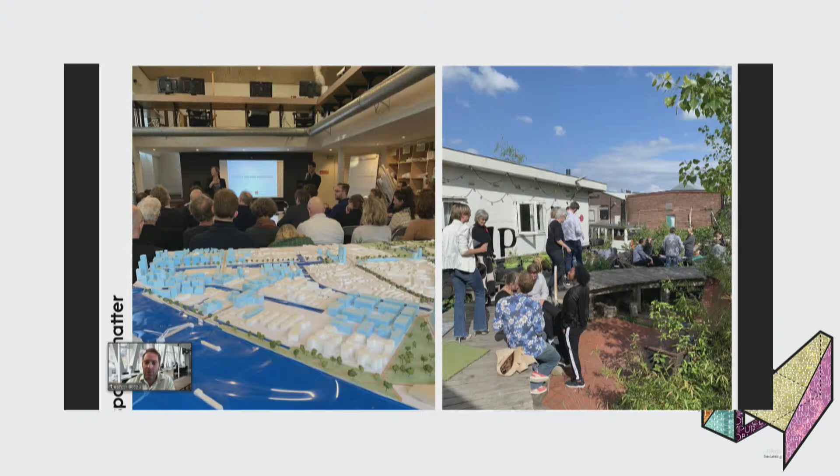They focused on how to deal with the green in the area. One of the main topics in the master plan was how can you embrace this pioneer DNA of the Buiksloterham? How can we reserve spaces for things that you cannot plan top down, but need to come from citizens themselves?

I think that was kind of fixed in the experimental zoning that we created. There will be 60% residential program in the area, and 40% different program. Of that program, 10% should be experimental. I think that's a real key ingredient to make a neighborhood really attractive, that there's new stuff happening all the time.

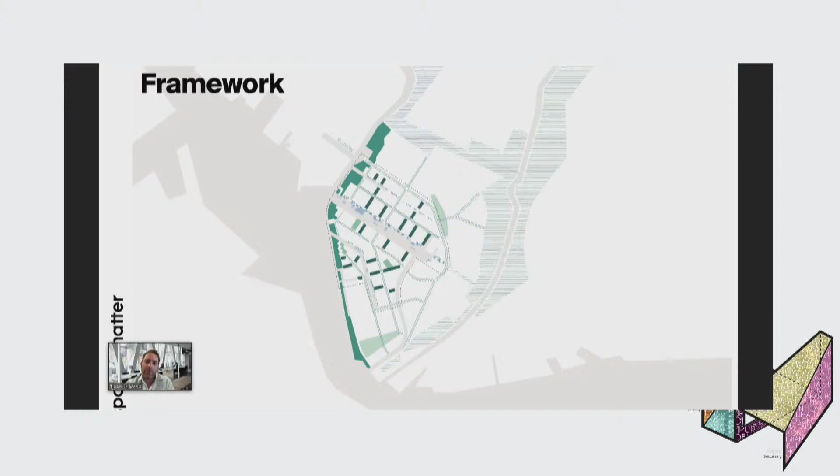So what we and all the other offices did is create not an urban plan or master plan, but an urban framework in which all kinds of initiatives can land. The future of this area will look a bit like this. It's more about the density than about the actual shape.

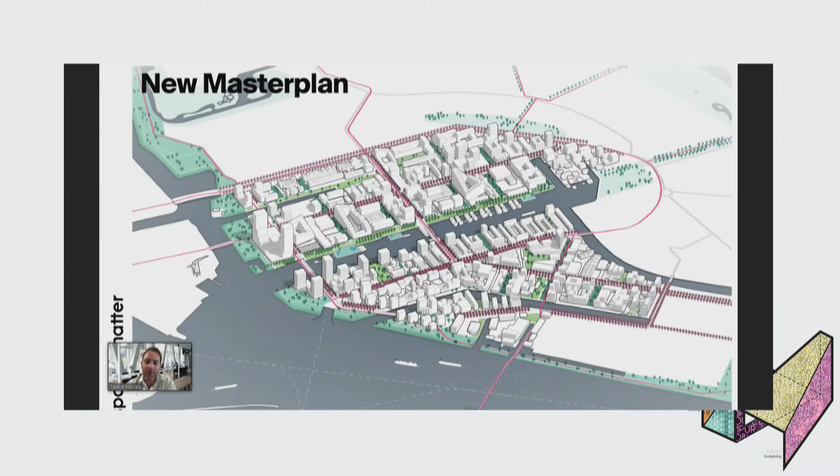The experimental spots, which with my mouse I cannot show you, but there's a lot of them, so 10% is experimental kind of playground in the area, and they are paid for by the benefits of the commercial residential housing. So you can also make it financially feasible to have a low ground fee, low land fee for experimentation. I think that's a crucial element of this plan.

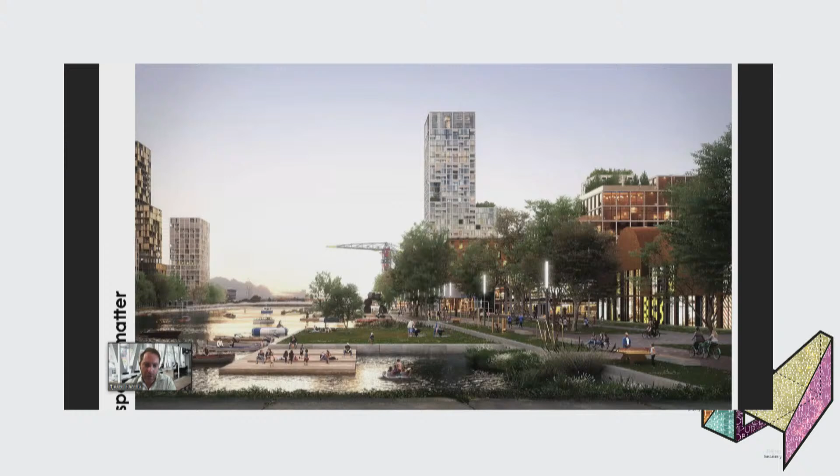The mobility hub that I showed you at Schoonschip looked pretty low tech. There are now plans to also use this model of mobility hubs all over the area, the idea of having mobility parking above a plinth of activity, possibly also to be combined with schools in the area. And this is the look of the canal that we see in the future.

I also would like to show this map. This is the map that the municipality made to make this idea feasible - a map with rules of the game of how high you can build and where you can build. But there's also a big booklet next to this with a point system that seduces developers to take sustainability measures, and then they get benefits like being able to build more commercial housing, for instance.

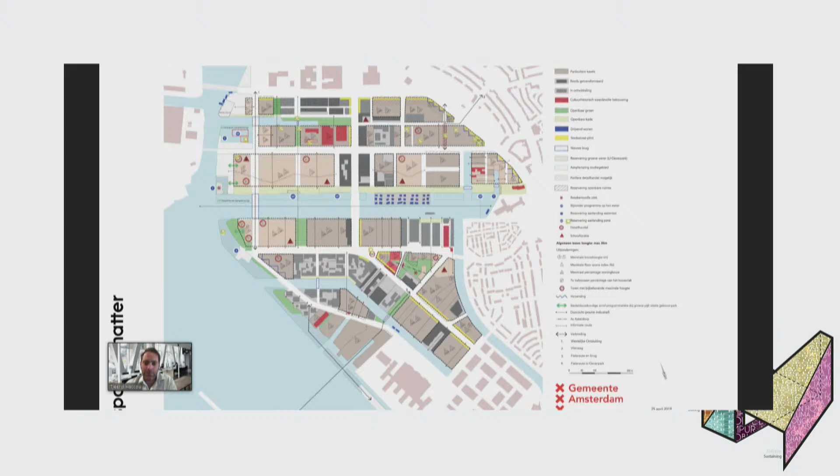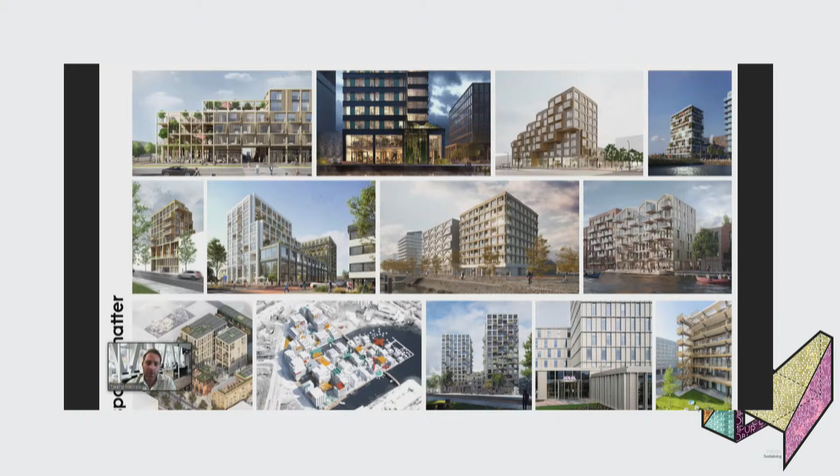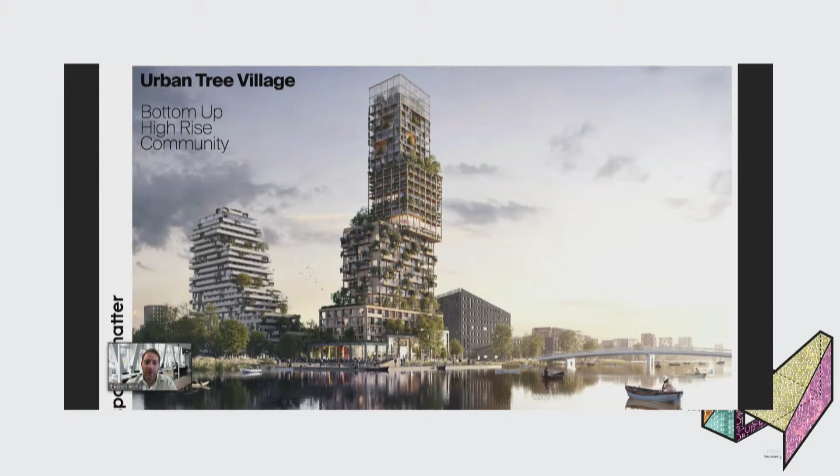So this is the tower that we envision. It's not actually Space&Matter that came up with the initiative. This is again a tower that was a dream of a group that calls themselves the Urban Tree Village, and they want to create a village kind of community, but in a high-rise tower. I think this is really a nice way to work on realizing dreams of groups of citizens and communities and to build up our cities with that in mind. So that was my part of the presentation.

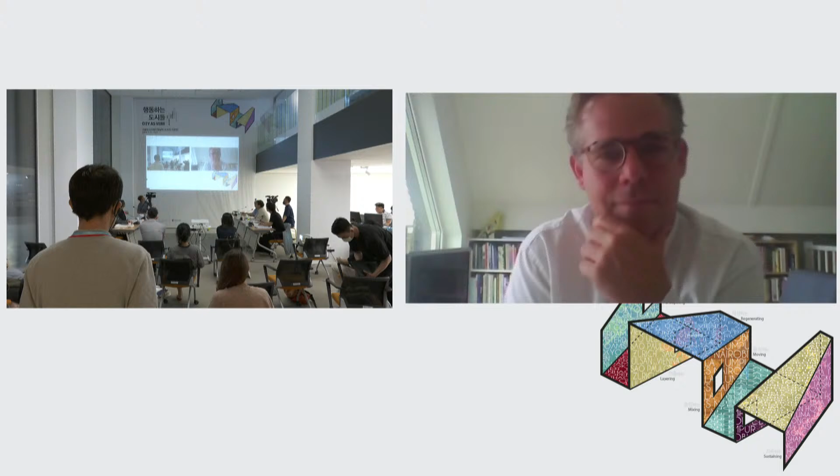I was also very impressed by the fact that cars account for only 10% of transportation but 50% of the space, because of parking. So how is your policy for parking changing? Right now you've reduced the number of cars per household to 0.7, but if parking space still takes up a lot of space, how are you going to deal with this mismatch?

I'm trying to think about the alternate reality. We wouldn't be talking to Paco, and we definitely wouldn't be talking to Tjeerd. We'd be talking to some rich developers. We'd be talking about parking everywhere. I don't know what we'd be talking about. The alternate reality is scary, to be frank. And it's a lesson to be learned that sometimes these pauses in history are actually very important.

Maybe these pauses have not existed for the city of Seoul. Maybe Seoul needs to take this pandemic now and take a pause and rethink things. So I'm just imagining an exhibit, two alternate realities: the reality you presented today, and the second reality of what would have happened if you had taken another path. So I'm really interested in this Crossroads. Could you talk about it a little bit? It seems almost like the happy ending to an amazing movie, but I'm sure it's not that easy.

Yeah, shall I start, Tjeerd? Sure. I think we're in a heavy crisis, a worldwide crisis, and in any crisis you will find innovation. So that's how you start it. And I think you're right - there are two parallel possibilities, and we're on one side, talking to you right now. Without the economic crisis, we wouldn't have this kind of innovation in the city.

When you look at the current health crisis and the way it spread with fear, I think that's a totally wrong way of coping with a crisis. But when you can turn it around into creating opportunity for inclusive urban design, for biodiverse design, for this kind of new sustainable ways for urban design, and co-work on it, I think that could be an accelerator for this new future. So I think we should find courage by co-working to deal with a crisis and create, in a faster way, what we're already working on for years. So I see it as a big opportunity, to be honest.